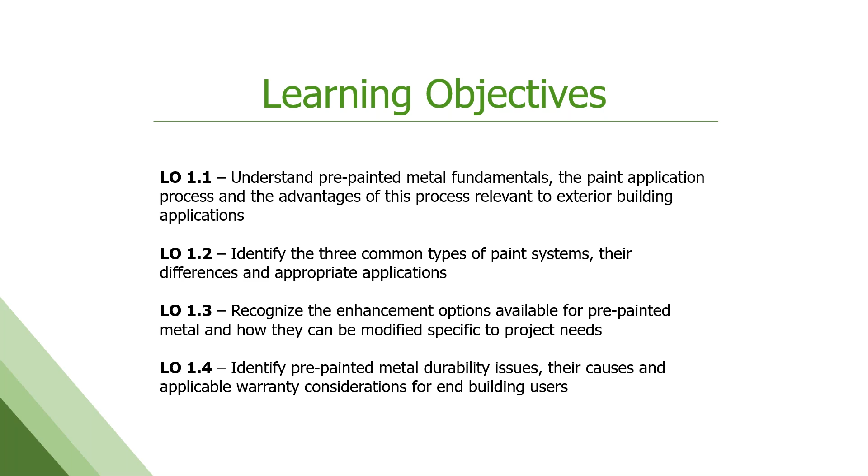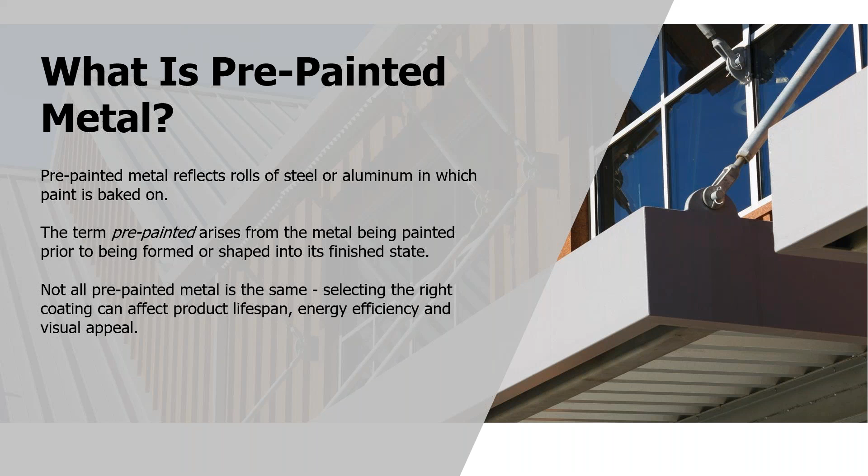So what is pre-painted metal? It's fairly self-explanatory. These are giant rolls of steel or aluminum which are painted in a factory environment, and the paint is cured onto a solid finish. I had for years used the analogy of giant rolls of toilet paper, which takes on a bit of a different connotation these days. But we're talking about 20, 30, 40,000 pound rolls of steel and aluminum, so not something that's easy to hoard. These giant rolls are painted first before they're formed into their final parts or pieces to go on the exterior of a building. But they're not all the same, and there are a lot of differences between them we're going to cover today.

Our first spotlight question that we'll answer in this next section is: how is paint applied to metal for the majority of building applications? It's rolled on for the most part, but not quite rolled on how you might be familiar with painting a room in your house. It's a little bit different process than that.

Here we have a diagram of a basic paint line, or coil coating line. We typically refer to it as coil coating in the industry. This is from the National Coil Coating Association, and there are also videos of this online if you want to check out an actual moving line. It's quite large, quite dynamic. It's a continuous process. The metal is cleaned first, then the paints are applied and baked on. This process typically runs anywhere from 100 to 700 feet per minute, so it's quite fast. The curing, the drying of the paint, usually only takes about 15 to 30 seconds, so very, very quick.

I like to compare this to the automotive world. Most people think of automotive paints and coatings as the end-all be-all of industrial coatings, and they're very good. There's a lot of crossover between automotive and coil coating as far as technique and chemistry. But a whole car these days takes about 30 minutes to 2 hours to finish, whereas we can paint enough coil through the coil coating process to build anywhere from 3 to 4, 5, 10 buildings in a matter of minutes. So it's a very different scale.

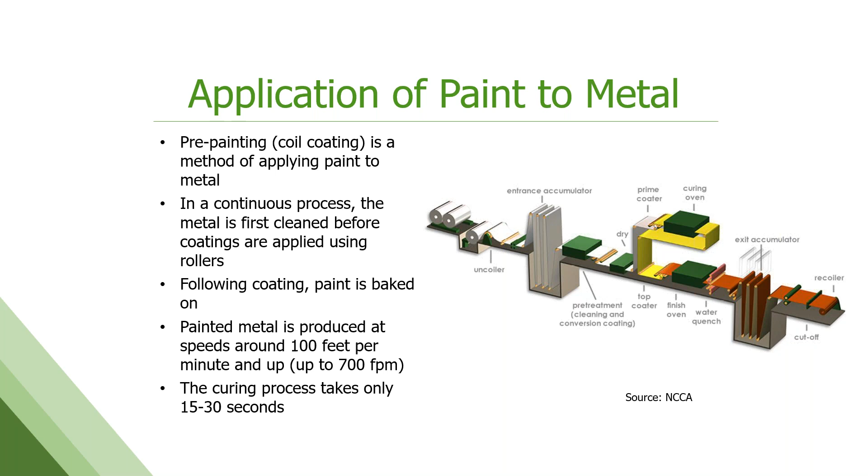Coil coating is the fastest and thinnest coating process in the industrial coatings world. This brings a lot of advantages to the table.

The substrate is cleaned and treated prior to the paint going on, and this all happens very quickly and in close succession to one another. So you get an incredibly great adhesion of the coating to the substrate. It's done in a very controlled manner, so we get great consistency from run to run, from batch to batch, from coil to coil.

It's a very efficient process as well. We're using very little paint. Typical paint system is about 1.4 mils thick. I'll do the math for you - that's 0.0014 inches. For comparison, paper is 2 to 3 times thicker than that. I'm going to layer a paint on that's thinner than paper.

By comparison, most other industrial coatings, including automotive, are 2 to 5 mils in thickness, so a substantial difference in the amount of paint. And because all of this is done before the fabrication of the final part, these coatings have to be hard, durable, but yet flexible as well. So there's a lot of chemistry and science that goes into the paint to make this happen.

The coil coating process, while we're using solvent-based paints, is a closed loop system. Our curing ovens capture and burn all the VOCs. We're not releasing anything into the environment, which is nice.

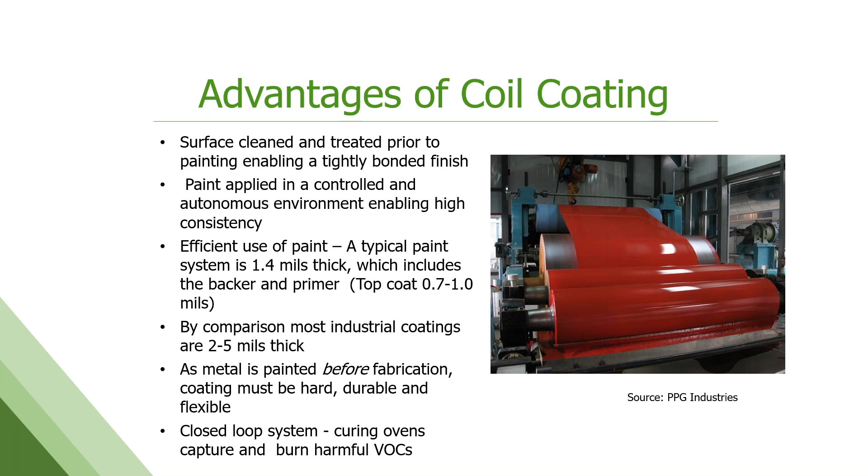However, there are a few limitations that come with this because of the scale of it. It's very, very rapid. Once you're set up and running, you need to paint a lot of material to make it cost effective and efficient, so we typically run large runs of the same color all at once. This is why most metal panel fabricators have a restricted or limited standard color palette, usually of 18 to 25 colors. Doesn't mean we can't do custom colors in smaller runs, but there are some cost and lead times that come with that. So that needs to be kept in mind.

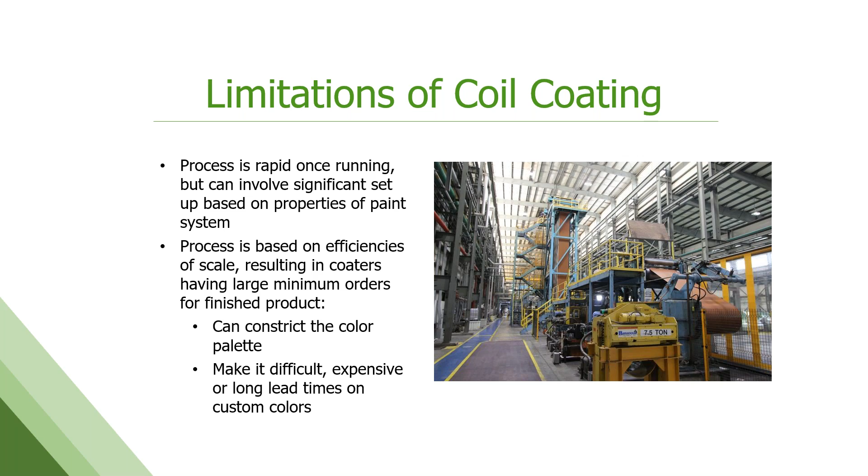The quality control through this process is quite rigorous. As you can imagine, these paints and substrates have to go through a lot of handling and forming after the fact. So the paint companies do a lot of rigorous quality control on the paints, and we do a lot of rigorous quality control on the finished product once the coil is painted. We've listed here some of the more critical ones.

The T-bend test, this is where we actually fold the metal back on itself very tightly, and we look to see if the substrate or the paint is cracking or opening. We do a reverse impact test where we drop a hard, sharp weight on the surface to make sure that the paint adheres and there's no cracking or delamination.

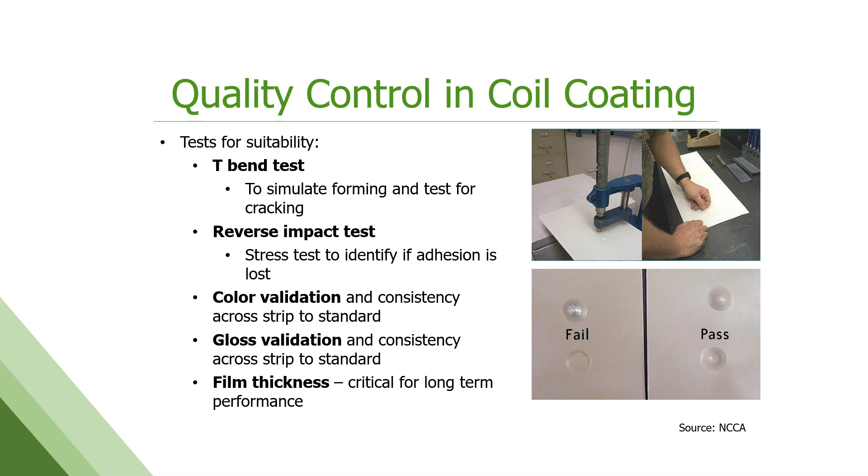We check color rigorously, which is very important, especially in the design world. That color needs to be consistent throughout the whole coil, needs to be consistent across the width of the strip, and color needs to be consistent from run to run and batch to batch. We check gloss, we check film thickness, which is very critical for not only appearance, but also the long-term performance and warranties involved, which we'll get into later in the presentation.

If you want to see any of those quality control tests done for real, I think there's videos on the Coil Coating Association website as well that you can check out, and you can see those tests actually being performed and what it takes.

So I want to talk a little bit now about the layers of a pre-painted metal panel, starting with the substrate itself, which, like I said, is usually a metallic coated steel or aluminum. Sometimes you see stainless and some other substrates, but it's usually steel or aluminum.

So working from the inside out, you have your base metal, let's say it's steel in this case, with a metallic coating, usually zinc or a zinc aluminum alloy, which we'll get into some specifics here in a few slides on that.

That provides corrosion resistance. After that, we have a pre-treatment that's applied, which helps with adhesion and again, corrosion protection long-term. After that, there's almost always a primer applied to both sides of the strip. Primer does a couple things. It helps provide bite and adhesion for the top coat that's going to go on.

It also adds another layer of corrosion protection. Then we have the top coat on the top side, which will be the color or pattern chosen for the installation. On the back side, we usually have what we call a backer or bottom side paint, which is there for protection and might also be seen depending on how the installation is done. So it needs to be visually pleasing as well. And then there are optional clear coats, which we'll talk about in a little more detail later on.

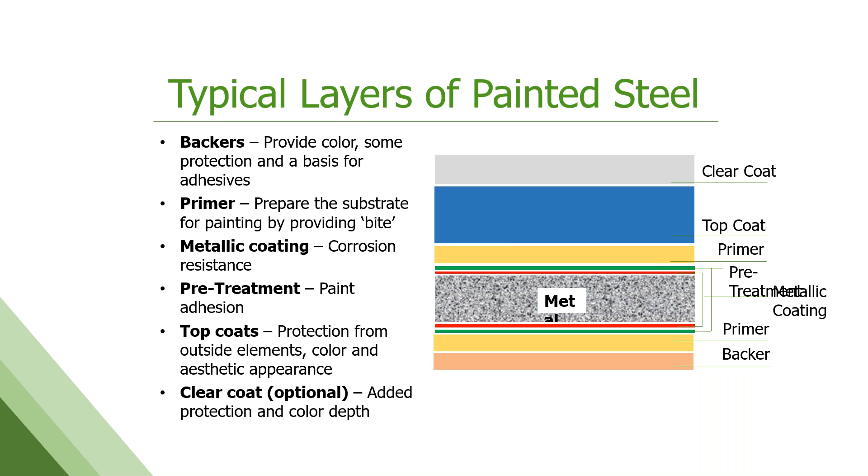So the metallic coating portion on the steel is really important. The two most common, of course, are hot dip galvanized and galvalume, or zinc aluminum. Hot dip galvanized is 100% zinc coating, been around a very, very long time. Most people are familiar with it. Galvalume or zinc aluminum are trade names for a 55% aluminum, 45% zinc combination, where the aluminum offers enhanced corrosion protection, and that 55% ratio is the optimum ratio to get superior performance out in the field. It's been around quite a long time now. We do see this product spec'd a lot in architectural specs for monumental type buildings and government jobs because of its superior performance over galvanized.

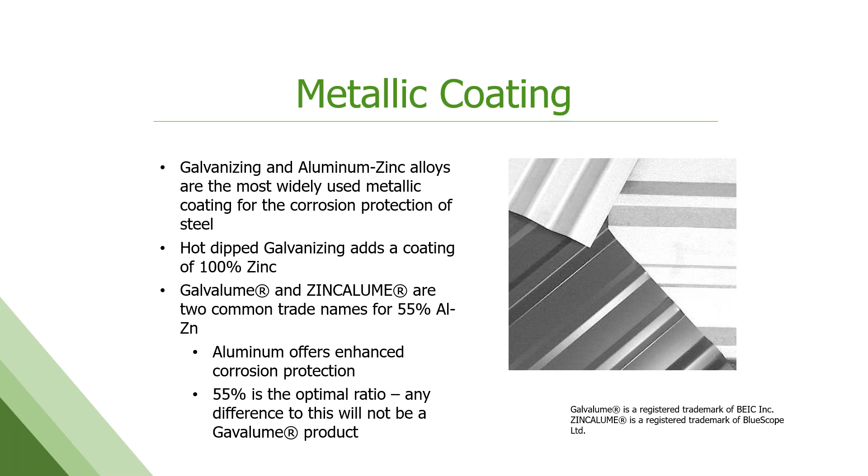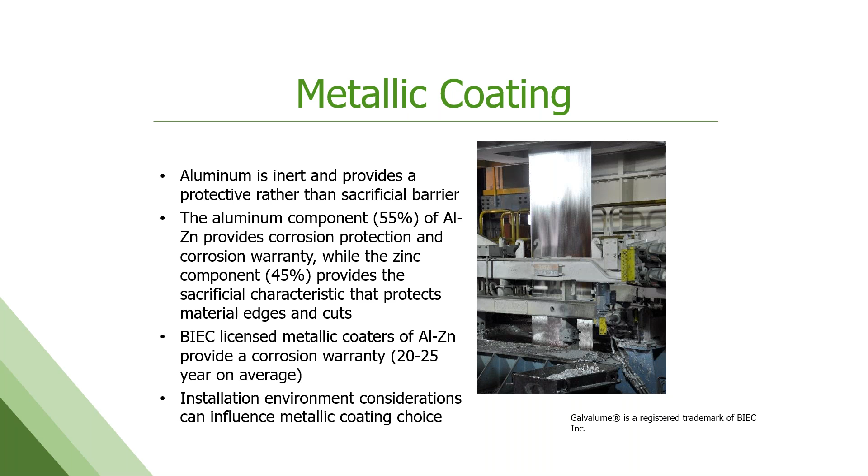The reason it's so good is that the aluminum portion is inert, so it provides a protective barrier rather than just sacrificial, which is what the zinc does. Most of these types of substrates come with some sort of corrosion warranty. If they're licensed - you do have to be licensed to make this product - BIEC is the license holder and manager of that product. Most of the corrosion warranties out there are 20 to 25 years on average, which is not something you're going to get on just straight galvanized steel substrate.

So then we move on to the paint portion - the fun part, really, the part we see, the part that's designed around. What is paint? I think most of us know what paint is, right? It's a liquid designed for application to a surface in a thin film that cures to a solid film. It does two primary things at the end of the day: it protects the surface of whatever it's on, and it creates the desired aesthetic. And as we just reviewed, the methods for application can be quite varied: brushing, dipping, spraying, vacuum coating, and rolling. Large scale rolling is what we're talking about here today.

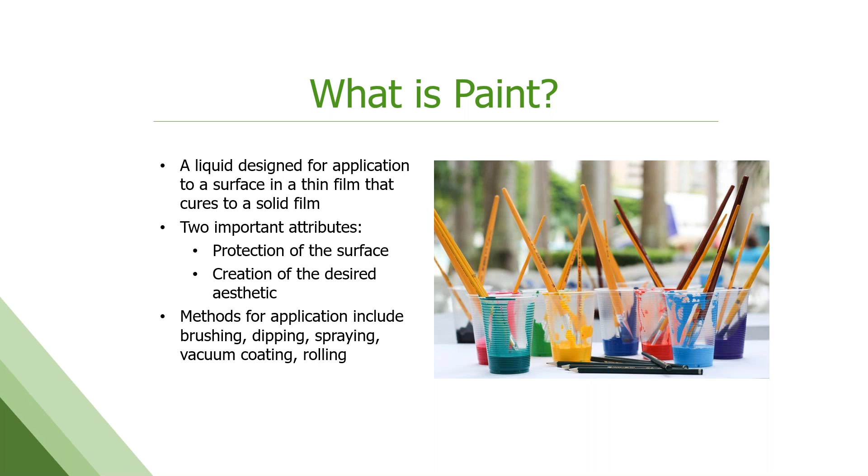There's a lot of components to paint, and this is where we're going to talk a little bit about chemistry. I'm not going to make you do any chemistry, I promise, today - no math either. So the primary components of these paint systems are broken down into four: resins or polymers, that's the binder of the paint and determines most of the physical and chemical properties of the paint system; and pigments, which obviously is the color and look of the paint.

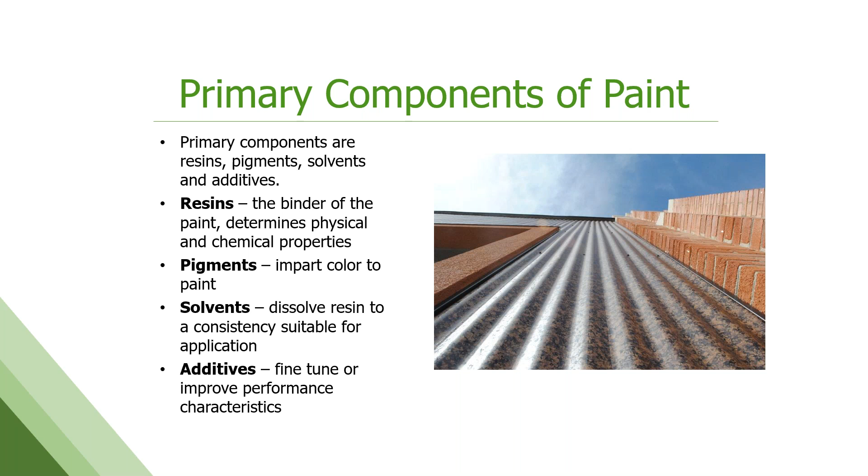Solvents - we've got to make it liquid so we can apply it. In our industry, they are petro-type solvents, hydrocarbon type solvents. We don't use waterborne systems very often; that's pretty rare. And then there are additives that are used to fine-tune the coating, either for performance enhancements or particular end uses.

Here's a summary of what each of these bring to the table. The resin, again, really is the backbone of the paint system. It's going to provide the durability, hardness, flexibility, adhesion, gloss, corrosion resistance, chemical resistance, and long-term performance out in the elements. The pigments, while mostly aesthetic - color and hiding - also provide corrosion resistance, film strength, water resistance, and, not listed here, UV performance, so that we don't want them to fade.

And again, the solvents are really for the application side - all those solvents are gone in the finished product, they're not left, but they allow us as the applicator to be able to pump it. They come in 50-gallon drums. We've got to be able to pump it, get it into the coater head, have good flow, easy cleanup, and be able to control film, those sorts of things.

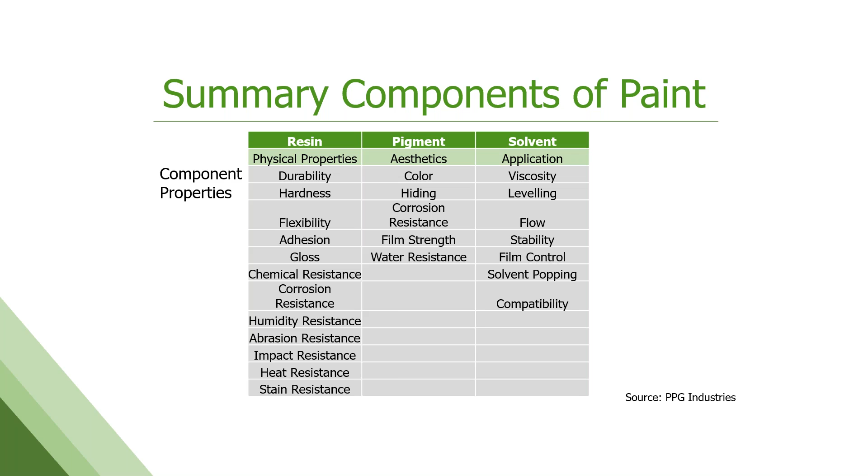So if you look at how these components make up the composition, this is a typical average weight percentage. The resin is a lot of it, along with the solvents in the liquid form, which are gone by the end. Then the pigments - your pigment to resin or polymer binder ratio is typically pretty equal, so there's a lot of pigments in these systems. And then the additives are very small.

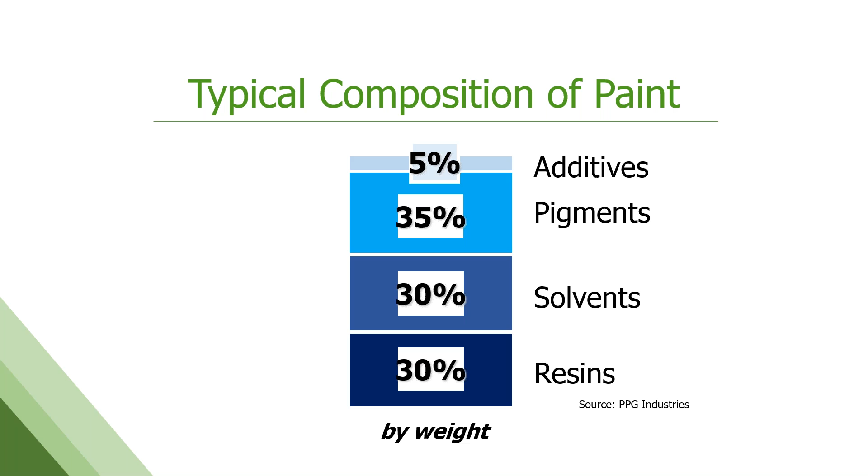So how do you pick the right paint? There's a lot that goes into this. You need the right balance for the end use. On one edge, we've got very soft, flexible coatings, which might be good for particular end uses, but they might not have great impact resistance and may scratch easier. On the other extreme, you have very hard, brittle coatings, which may have better performance in some aspects, but you might not be able to bend it into a panel. So we're always trying to find a happy medium when formulating paint for pre-painted metal.

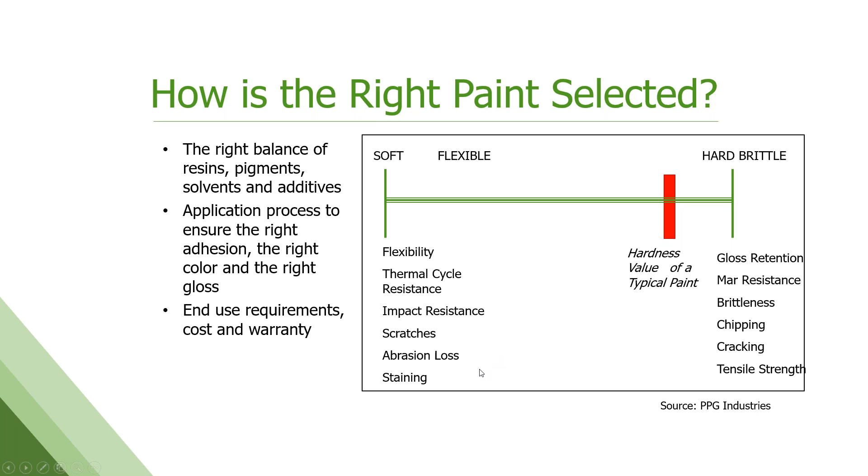So then if we get into pigments and color, pigments are insoluble solid particles. We have to grind them really finely to disperse them within the resin to get good stability and good consistent color. There are two different kinds of pigments we use in this industry, primarily inorganic and organic.

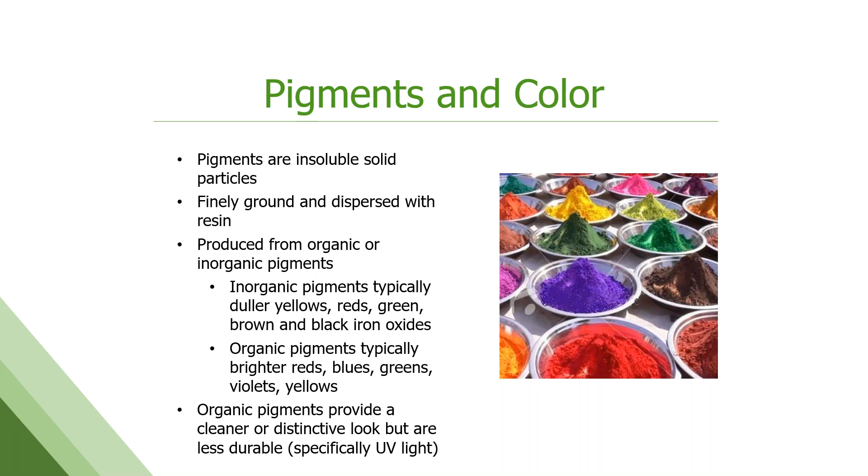The science of color is very important in our world as well. Color is the eye's perception in the visible wavelengths. We can do this numerically and with computers, represented as an LAB number. L is dark, A is the red-green scale, and B is the blue-yellow scale. Most of our painted products are assessed by a computer for color, but also with a visual eye at the end of the process, and very tightly controlled—controlled at a level the human eye cannot perceive, but the computers can.

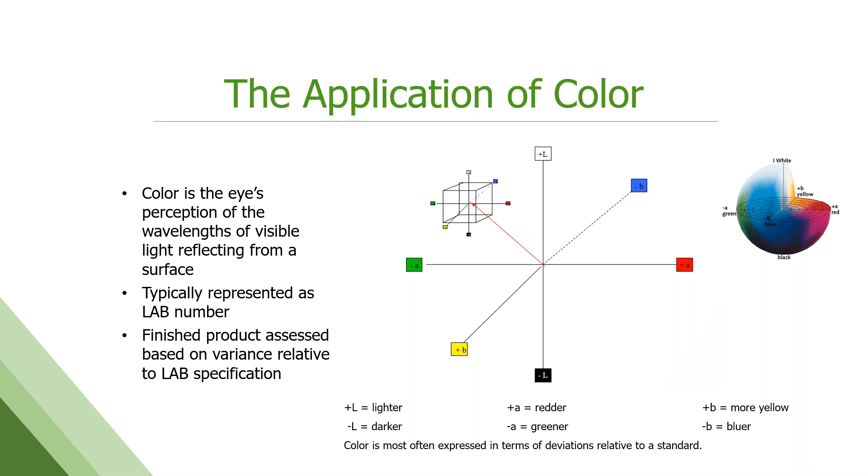So I don't know if we want to stop here real quick for some questions.

Hi, Michelle. We've got a couple of questions here. Jack is asking about when you're putting all those layers on during the run, are the layers applied in the same run, I think he means. Yeah, excellent question. I should have made that more clear.

Thank you. So most paint lines can do two layers of paint in what we call one pass. We do primer, bake it through the oven, it goes to the finish coater, gets its finish coat, goes through the ovens, gets baked, and it's done. If we need more coats than that, we would put the coil back through the line and add additional paint. But typically you can do two layers, top and bottom, in one go.

Great, thank you. The second question is from Philip. You may be addressing this later in a later section, but he's asking about the weathering ability of bonderized finish on panels.

I'm not going to get into bonderized specifically in this presentation. I can tell you that bonderized was developed many years ago, specifically to help combat acid rain issues in the northeastern United States—that's where it originated. So it's a pre-treatment under the paint. It does have some enhanced corrosion performance, especially in acidic environments, although as a country we've done a very good job of reducing acid rain, so it's not as much of an issue as it used to be. But no, that's not specifically going to be in this presentation.

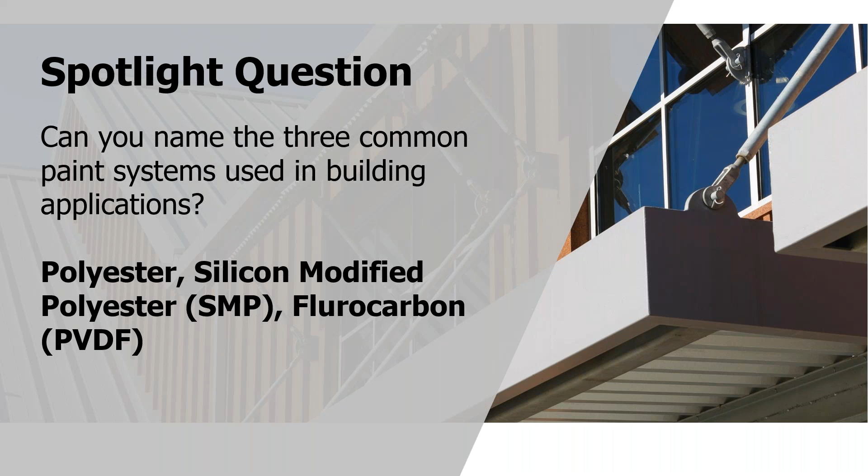Okay, thanks. So the next section here is going to be the common paint systems and their differences and attributes. Can you name the three common paint systems used in building applications? Well, you're going to be able to here shortly. So the three we deal with the most are what we call polyesters, silicone modified polyesters or SMPs, and fluorocarbons or PVDFs.

Unfortunately, we as an industry have decided that fluorocarbons need about 8 different other names just to add confusion to the mix. Polyesters are almost always called polyesters. Silicone modified polyesters are almost always referred to as SMPs. However, fluorocarbons go by a whole range of names, and I've listed some of the most common ones here. PVDF, polyvinylidene fluoride - that's the hardest chemistry we're going to have today, FYI.

That is also known as Kynar 500 or Hylar 5000, and that Kynar and Hylar name are probably what you would see most often in architectural specs and Corps of Engineers specs. They are registered trademarks - you have to be licensed to use that resin or polymer chemistry, and there's some very tight guidelines around its use that have to be followed as well.

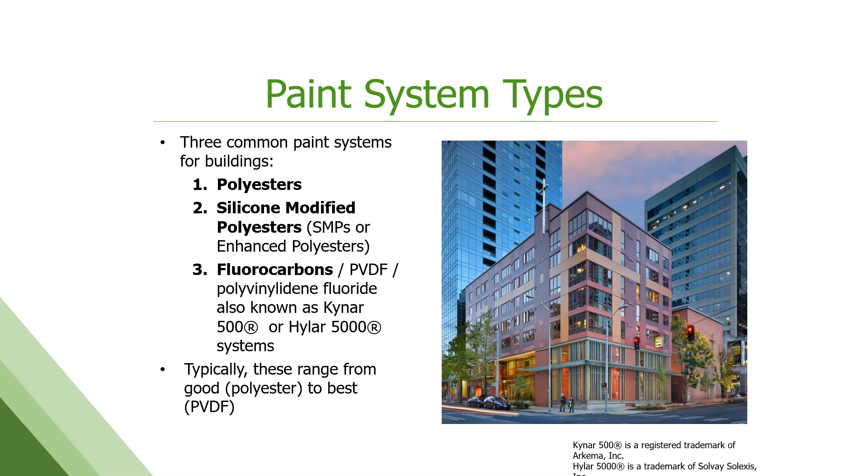These are listed from good to best, but we're going to see that there's a lot of range, especially within the polyesters and what they can do.

Polyesters have the widest range of formulation and can be used in the widest range of applications, everything from interior non-exposed components to exterior components. They're very cost effective. They can have great flexibility and hardness. They come in a wide range of colors and gloss options. Very, very versatile. We typically see it for exterior use in gutters and downspouts, rainwater goods, agriculture and light commercial, and appliance wrappers.

But again, I always like to point out the flexibility of polyesters with this example. So think about polyester paint that's on this lovely little outbuilding that we have here versus the polyester clothing you might wear - same base chemistry at the end of the day, but two very different outcomes in how it's formulated and made. So polyesters run the gamut.

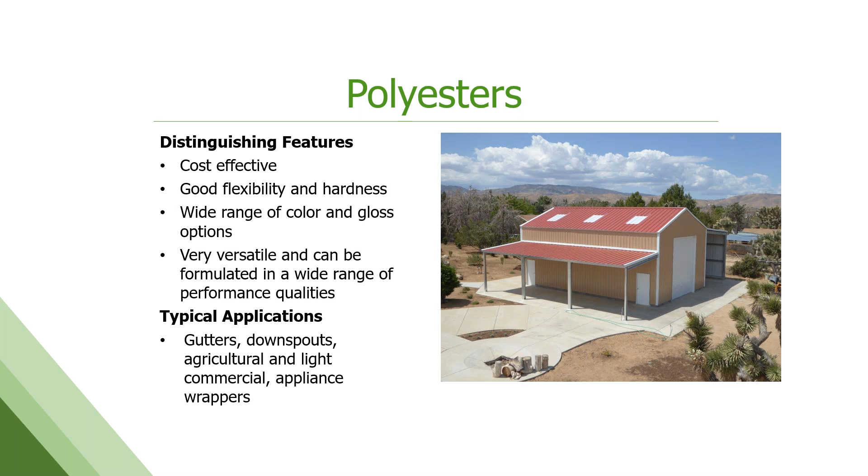Silicone modified polyesters are just what they sound like. These are polyesters that have had a silicone modifier added to their backbone that gives them improved weatherability and durability out in the field, improved resistance to chalk and fade.

Still available in a wide range of colors. A little bit better cost point than the PVDFs, which are the high end, but maybe a little bit more expensive than polyesters. We see SMPs used a lot in light commercial and residential. They're a really good product for those end uses.

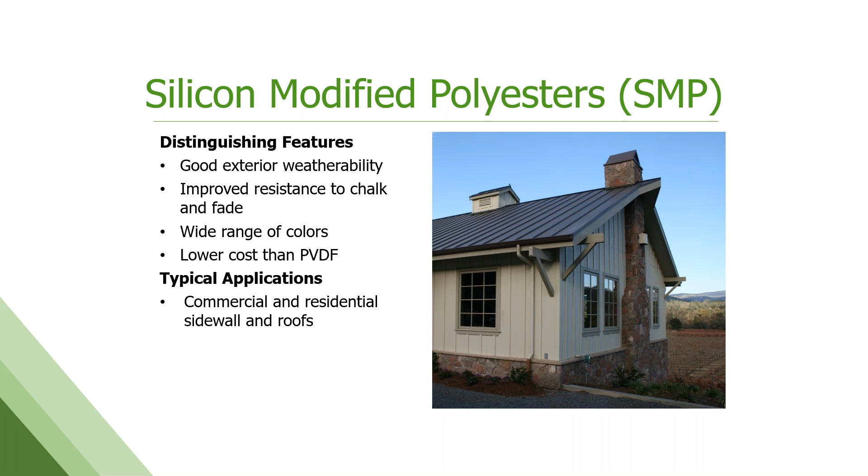The fluorocarbons now, this is the Cadillac. This is the end all be all. It has been for a long time in this industry. They go by several names, but they have superior and exceptional chalk and fade resistance. They hold up well in aggressive environments, whether that be industrial or marine, great chemical resistance. They have excellent formability. And we see these again on high-end architectural projects, monumental type buildings, and anywhere it's specified, and where you need good weatherability.

They really are great products. I like to point out, to put it in some context, PVDF is one atom removed from Teflon. So this is the closest cousin to Teflon that there is. And most people can wrap their head around Teflon and how durable that product is. So this is a very close cousin.

We don't work with Teflon directly because the heat required to make Teflon into a manageable form isn't really feasible, and it's very hard to get it into a liquid state like we need for the application process. So this is sort of the next best thing.

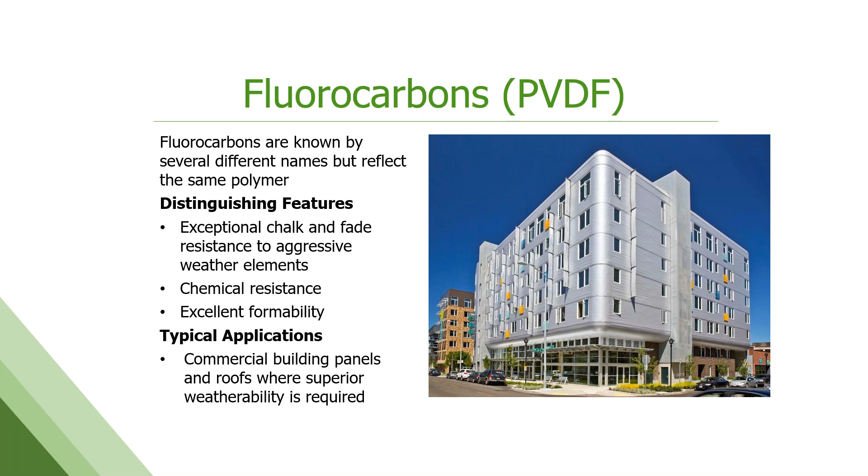So the polyesters can be good to better, they're cost effective. Warranties on them range from none to moderate, like 20, 25 years. Their durability is limited to good, very versatile, wide range of colors. They do meet the AAMA 2603 621 specs.

SMPs step up - you get a moderate price point. Warranties on SMPs can be quite good; we're seeing anything from 25 to 40 years now in the industry. Durability is medium to high, and that's sort of dependent on the pigmentation that's used, not necessarily the resin itself. Wide range of applications, and again, meets AAMA 2604 better and 621.

And then the PVDFs or the Kynar, really the best overall paint system, but a high price point, but very long warranties - we're seeing warranties 30 to 50 years in some cases now, which boggles my mind a little bit. The best durability you're going to get out of the paint systems. Again, high-end architectural, commercial, high-profile projects primarily. Excellent chalk and fade resistance and chemical resistance. And it is spec to AAMA 2605 and 621.

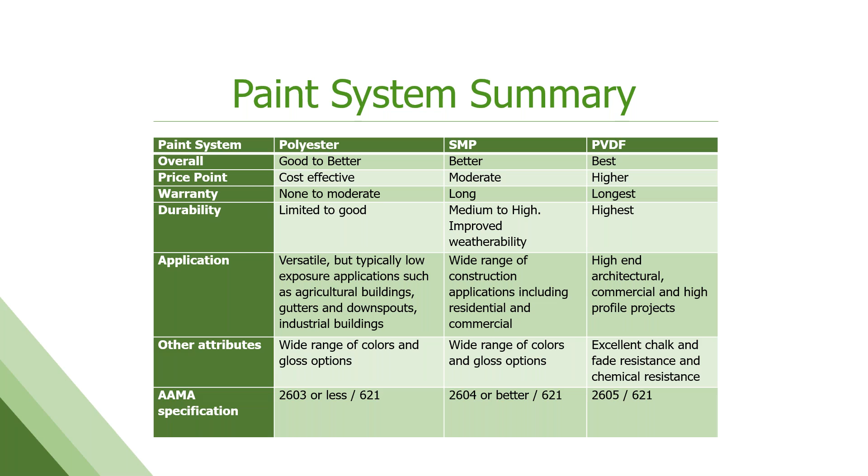So what are the considerations? You know, all these paint systems are out there. It's a bit overwhelming. How do you just sort of decide what you want to do?

So these are the things to keep in mind. First of all, because of the wide range of polyesters, they're not all the same. If someone says a polyester will be fine, you probably need to ask a lot of questions, find out what the warranty really is, and is it a polyester that's really designed for exterior application. These days, the differential between high-end polyesters and the SMPs can be marginal. The very high-end polyesters have gotten very, very good in the last 10 years and do have very good performance, so they've closed that gap considerably.

However, the PVDF is still going to be the best UV resistance for optimal exterior durability. Again, the Kynar and Hylar name is a trade name, and you have to be licensed. If a paint supplier does not have a license to use that product, they cannot use those names. That's more of a concern with product coming in out of Asia, which is typically not licensed. All the big US manufacturers are licensed and good to go. You've got to use at least 70% of that PVDF Kynar resin in the overall resin composition to get good performance. Anything less than that's really not going to perform very well.

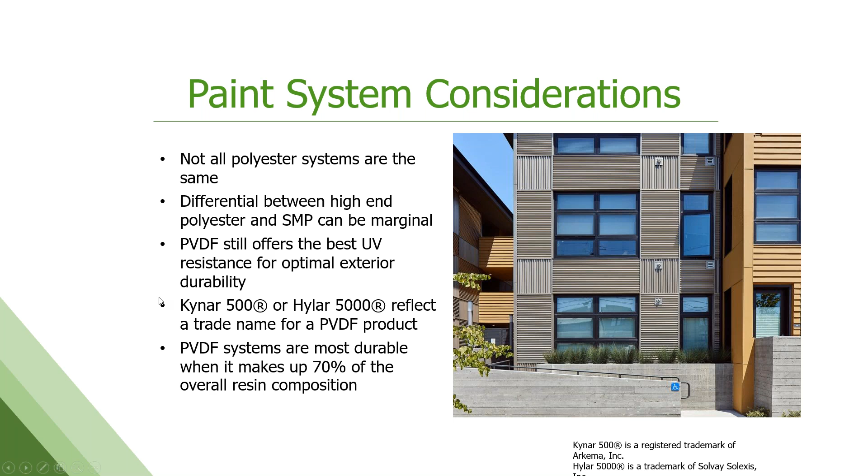Tyler's asking about cold weather performance of paints in Alaska. Are there some paints that perform better? Do all paints perform the same? We've not seen, once installation is done, much difference in performance versus warmer weather. The one thing we do run into in cold weather is the actual forming of the metal. When a fabricator has got coil and they're forming panels, if it's done in cold weather, there can be issues. The paint might crack or undergo a phenomenon we call hazing, where you get a blushing effect on the paint until it warms up again. So not too many issues once installed in cold climates, but anyone forming or roll forming products in a cold climate needs to use some caution. A lot of those guys actually use infrared lights and heaters on their equipment to warm the steel and the paint up a little bit before they form it to avoid those problems.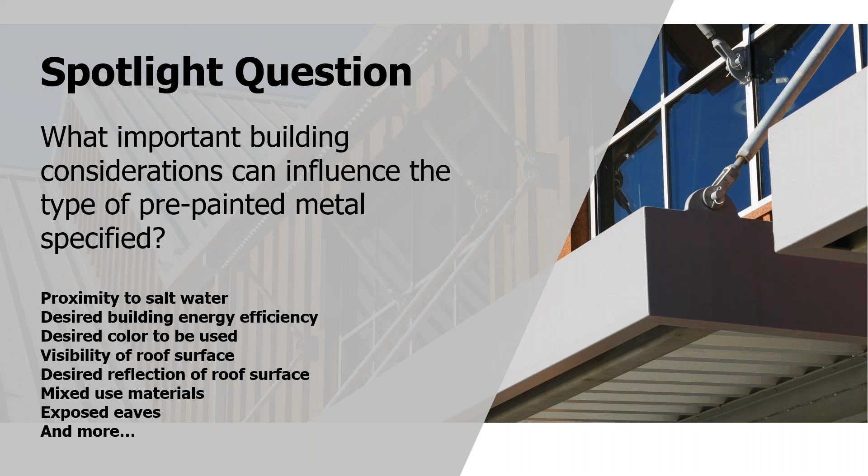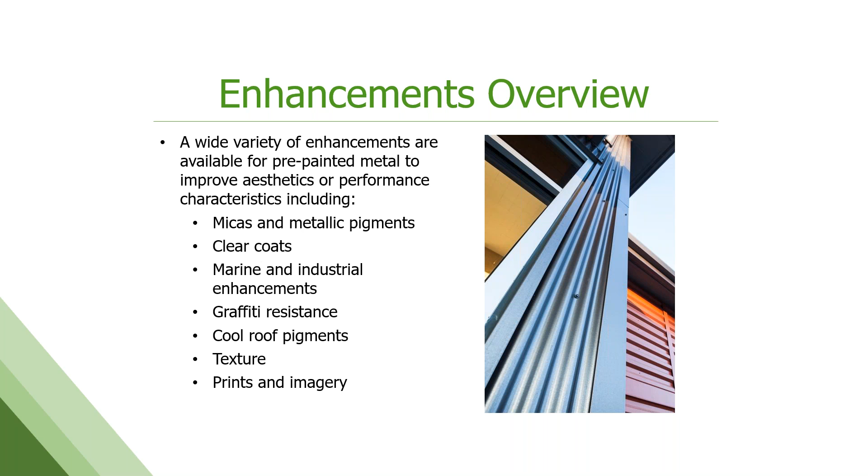So we've broken this down. This is not all of them, just the more common ones we run into on a regular basis for enhancements: micas and metallic pigments, clear coats and what they can and can't do, marine and industrial enhancements, graffiti resistance, cool roof pigments, energy efficiency, textures, and prints and imagery that can be done.

Micas and metallics are actually fairly common these days. Most panel manufacturers have a few metallic colors on their standard palette. Historically you used real metal flakes to achieve the sparkly, shiny look, but that has progressed to mica pigments. We still use the term metallic in the industry, but the majority are actually mica pigments, giving a sparkling or light-catching effect.

There's also pearlescent or color-shifting pigments available. Some of you may have seen that used on cars more than buildings, but they are out there. One project I can think of, for anyone on the West Coast—you can Google pictures of it—the cruise ship terminal in San Diego is a color-changing effect installation, and as you move around the building the color changes from an aqua blue to a dark blue. It's quite impressive and very pretty. So those are out there and available.

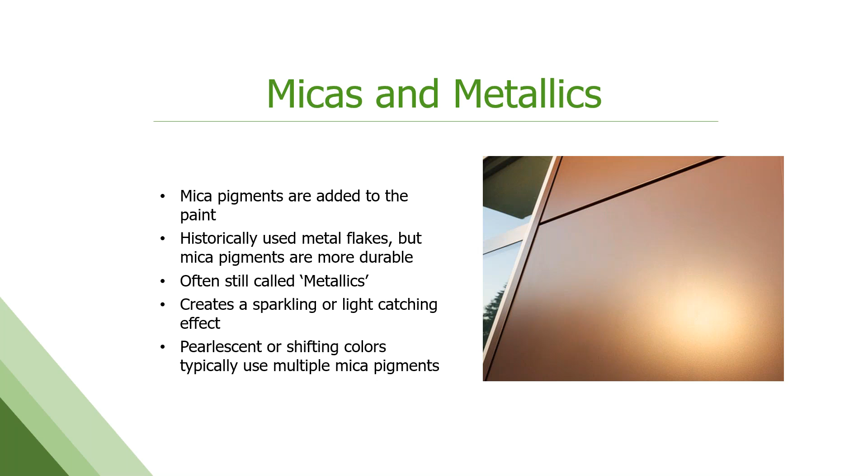However, this is the do-not-do part when it comes to micas. The mica pigments' orientation—how they lay out in the paint—is very important, and they're directional. When you look at it from one direction it looks one way; you shift to another viewing angle and the color visually shifts a little bit. So you've got to be really careful when you install these.

Both of these examples are silvers run out of one batch, one coil, all at the same time. But during installation, the installers flipped a panel 180 degrees relative to its adjacent panels, and you can see the visual difference. One way we combat this is to put directional arrows on the back side, so they all get installed going the same direction.

But they are batch sensitive too. So if you're going to do a project with one of these micas or metallic paints, you really want to run all the material at one time out of the same batch of paint, at the same time on the coil coating line.

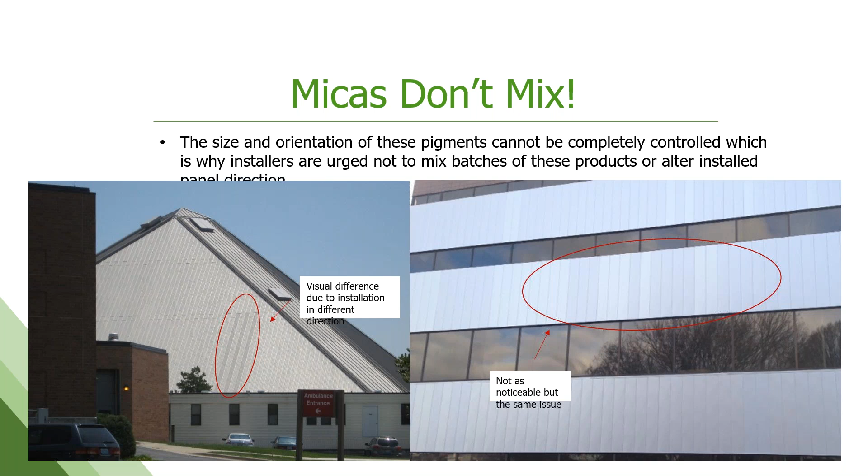Extreme environments—this is something we deal with a lot, especially at Steelscape, a company I work for, being primarily a West Coast company. We do a lot of work near the ocean in proximity to salt water, and we have ways to combat that. There are paint systems modified and enhanced to deal with the extra corrosion potential. There are coastal and marine paint systems available that can still come with a warranty—probably not as long as a regular paint system, but it is still warrantable.

These typically include high-build primers and/or the addition of clear coats to give extra protection, and these will be 3 to 4 layers. Someone asked earlier about how many layers of paint you can do at one time—for these marine and/or industrial environments, like chemical processing plants or mining operations, we typically have to put that coil of metal back through the line at least twice to get enough paint on it to perform in these environments.

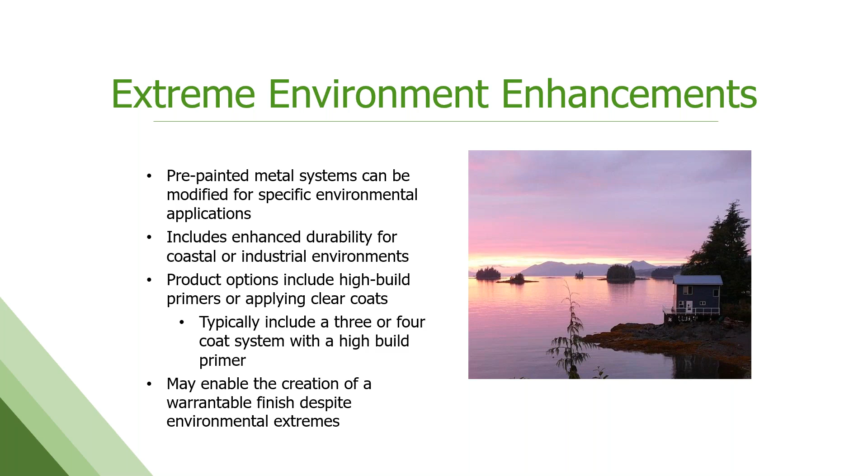The other thing clear coats can do for us is provide extra UV fade resistance, especially over organically pigmented colors. We talked about organic pigments earlier—those bright exotic primary colors don't hold up well, but you can put a clear coat over them with transparent sun blocker, UV blocking technology built in, to help protect them long term.

Clear coats can also be added to get higher gloss and add a sort of depth to the final product. They can also increase hardness and mar resistance, and antimicrobial properties—we do have antimicrobial clears. Don't see those used in exterior applications too much, but they're used a lot for walk-in coolers and food storage situations.

Graffiti resistance is a big deal too. There are clear coats out there that it's very hard to get anything else to stick to—paints, inks, or pens just can't adhere. And if it does stick, they're formulated to be very easily cleaned off without leaving any shadows or trace of the graffiti on the surface.

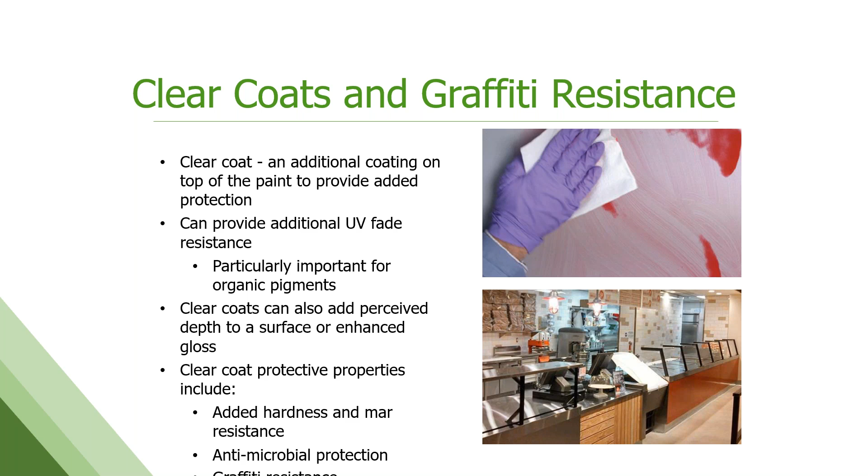But yet another cautionary tale—this one's not so bad. If you're going to use a clear coat, or if a clear coat is needed for some reason, you need to understand that clear, while we call it clear, does slightly alter the base color visually a little bit. These clear coats actually have a very slight yellow tint to them, which is from the UV blockers used in them. So on lighter colors, an example here, you can see from left to right: no clear coat, then with a high build primer, which can also affect color, and then with a high build primer and a clear coat. You can see that lighter color shifts yellow a little bit visually, but the medium and darker colors, you can't really perceive it.

So just a caution: if you're going to do a job that needs a clear coat, understand that it might shift the color a little bit, and that can be overcome with a reformulation of the color coat underneath in a lot of cases.

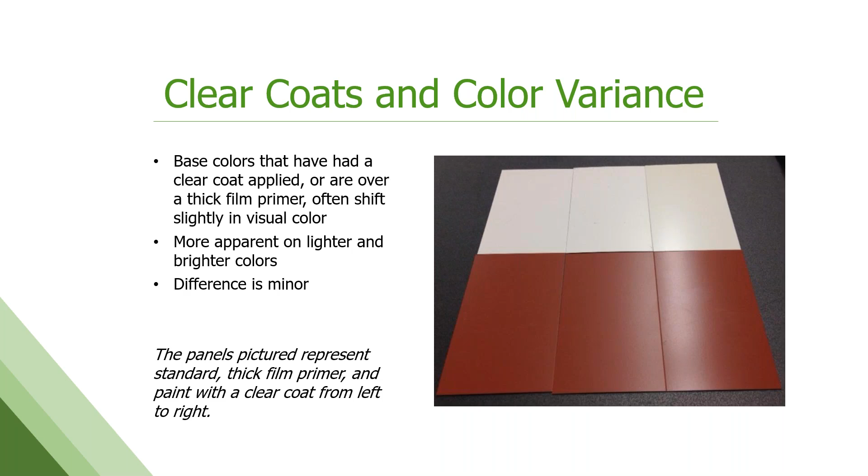Backers, or bottom side paint—this is the back side of the coil or the strip. It's often sort of taken for granted and overlooked because they're usually not seen, but we still apply them. It helps with transit abrasion, corrosion, and formability to have paint on that back side. It's typically an off-white or a light gray, some kind of neutral color. However, on eaves or overhangs, it might be exposed, so people are going to see it, and it does need to have some color consistency and control to it. That said, most paint coaters, coating operations, can do double-sided paint. So if you wanted red on both sides, that's doable. If that backside is going to be exposed and you want it to be an actual color, that can happen.

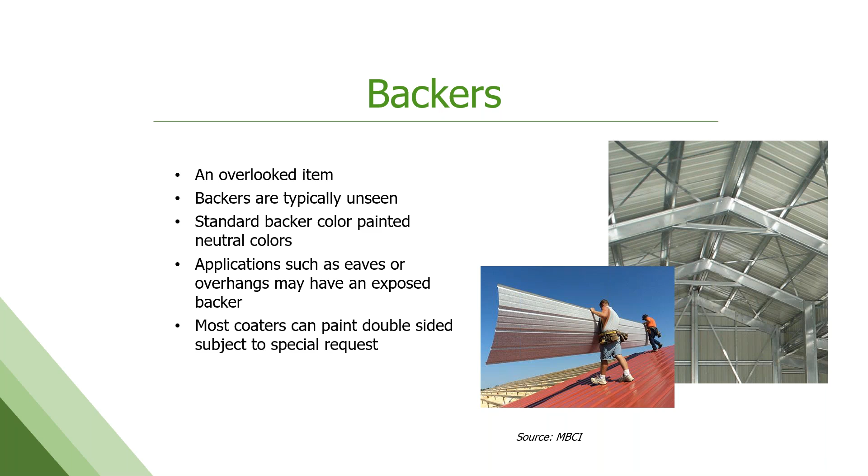Now we'll move into the cool colors, which, as Paul said early on, I was very involved in the development of and launch into the market. Probably the biggest advancement and change in the coil coating world in the last 20 years, which has been fantastic. What happened is that one of the pigment companies was able to come up with pigments that reflect infrared heat without changing their visual color appearance. The infrared wavelength is where heat generation occurs on surfaces, so that's important. This allowed us to develop dark colors—visually dark colors—that stay cooler than their non-cool counterparts.

Any paint system can be modified to be cool. It's all about the pigmentation, it doesn't have anything to do with the resin or the polymer. It does truly minimize heat buildup and reduces cooling cost in warmer climates. Actually, this has really become standard. Most paint companies, especially in the PVDF or Kynar paint lines, are formulated with these cool pigments as a standard. You don't have to request it anymore—it's become the norm.

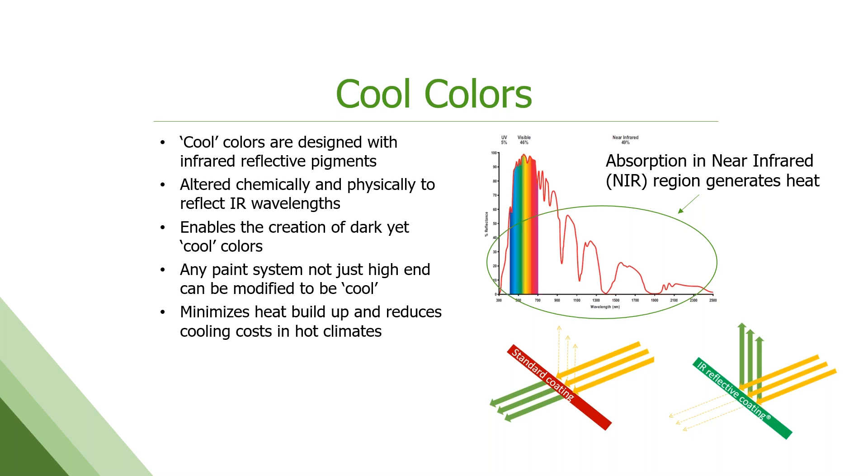There are quite a few terms out there that can be a bit confusing around cool pigments and cool paints, so we'll go over a few of those here. Solar reflectance is a big one—this is the amount of solar radiation reflected off a surface, measured as a percent. Emissivity is how well a surface dissipates heat from itself once it's gotten hot. That's important, because we know things are going to get hot in sunlight, but we want them to be able to cool or shed that heat well.

Those two values are then plugged into a very long, nasty calculation that gives you the solar reflectance index value, or SRI. This SRI value is what we see now in most of the codes. Both LEED, obviously, you guys are probably familiar with that, references SRI values. A lot of state and local building codes, especially in California, use SRI requirements now as well. The Cool Roof Rating Council is the primary third party that validates and measures this for manufacturers.

One interesting thing about pre-painted metal that's a huge advantage is that its SRI value does not deteriorate over time like other roofing substrates do. Typically it's an initial rating and a 3-year aged rating, and you will see if you go online to Cool Roof Rating Council that pre-painted metal 3 years out from its initial has the exact same SRI value it did initially. You can go 10, 20 years out and that SRI value does not deteriorate on pre-painted metal. It's because these coatings have such great durability—they're not degrading, they're not fading, they're not changing over time, which we think is a huge advantage for this product.

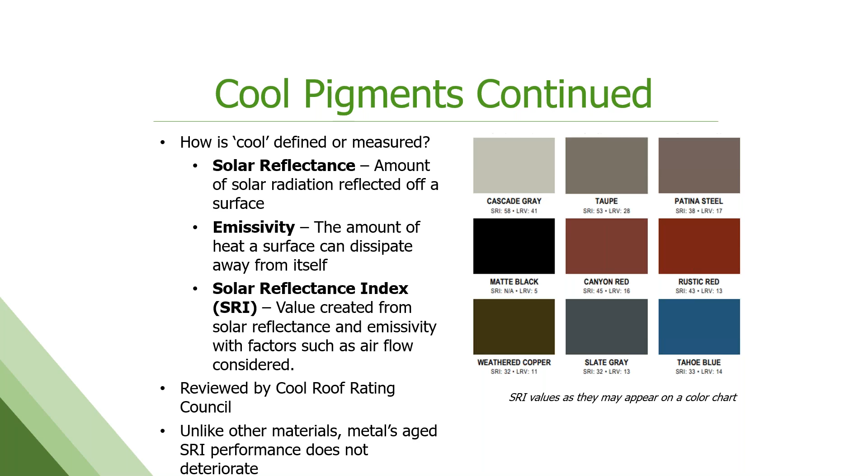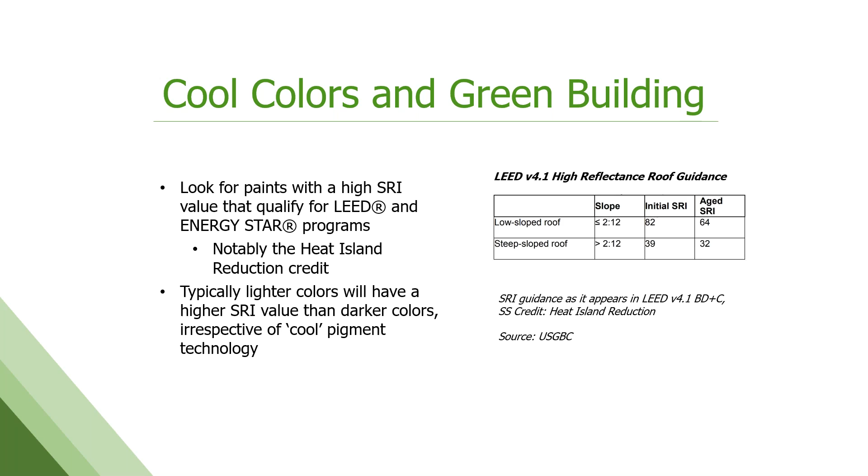Here's some of the LEED 4.1 specifications for SRI. Low slope moved up to 82 — I think it used to be 78 or 79 way back when. Steep slope is now an initial SRI value of 39. For low slope roofs, to get an SRI of 82, you're talking about whites and light colors only. For steep sloped roofs, you can get down into your medium colors and still reach that value.

The other item that has come up more and more in recent years is light reflectance or glare off of metal roofs. This can be perceived as a deterrent to using metal — the glare, the shininess of it. This reflectance value sometimes gets confused with the solar reflectance value we just talked about, but they are two very different and independent values.

Light reflectance is expressed as a percentage, and it's measuring the amount of visible or usable light that gets reflected off of a surface. Typically, lighter colors will have a higher value than dark colors, but not always. Texture can impact this — if you add some texture to the coating, it breaks up that glare or shine quite well, which is a plus in a lot of applications.

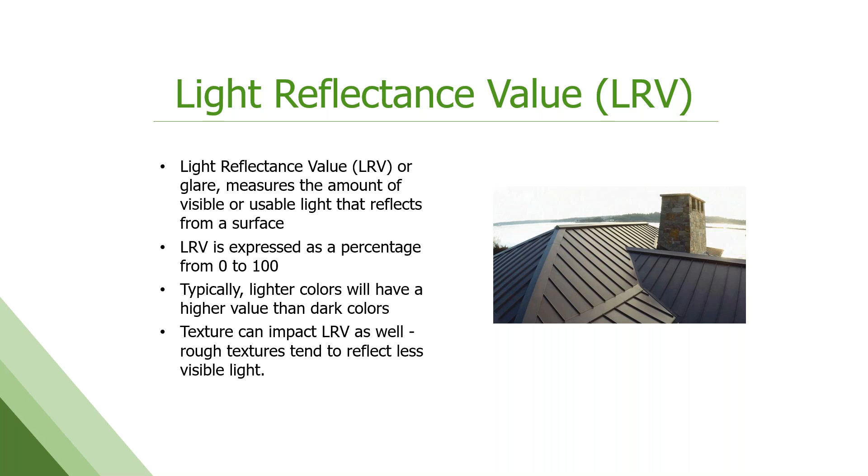We use a couple different terms around light reflectance: gloss and sheen. Gloss is the measurement of visible light at a 60-degree viewing angle. Sheen is measured at an 85-degree viewing angle. High gloss, high sheen on a paint system is going to result in a lot of glare, while low gloss, low sheen is going to have a very flat or matte appearance.

We have some examples over there of how those values end up affecting the LRV at the end of the day. Low gloss, low sheen is typically defined in our industry as being less than 8. Most standard paints these days in the Kynar paint system are in the 10 to 20 range, which is pretty common — so it's not high, but it's not super low either.

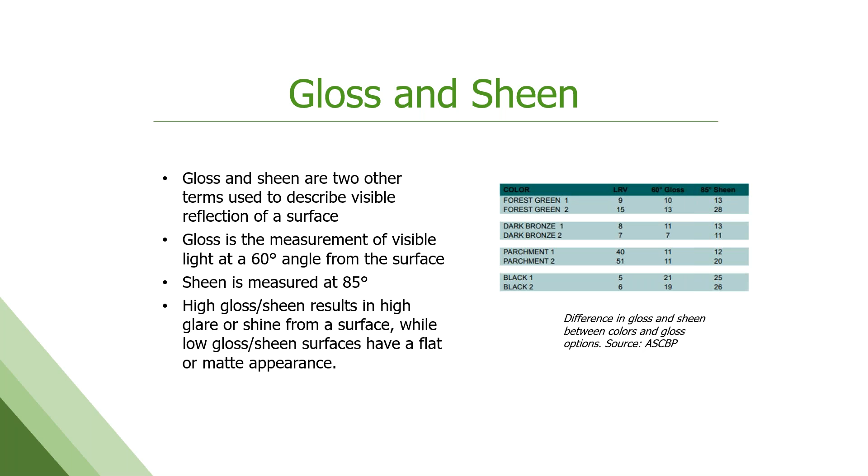But we're seeing that there's still a need for very high gloss applications for accents and signage. In the residential world, people are wanting to move to a more matte, less shiny finish. It's also an issue around airports and military installations, which have some pretty strict requirements about glare. Obviously, you don't want a pilot blinded by the shine off of a metal roof that impairs his ability to fly his aircraft. So we run into that.

Mentioned textures — textures are a great look, and we're seeing more and more of these. They not only help with glare and shine, but they give a really interesting depth, feel, and look to a finished product. This is done a couple ways: the paint chemistry can be altered to cause the paint system to wrinkle up as it cures, or you can actually add particulates and texturizing agents to the paint to get this rough finish.

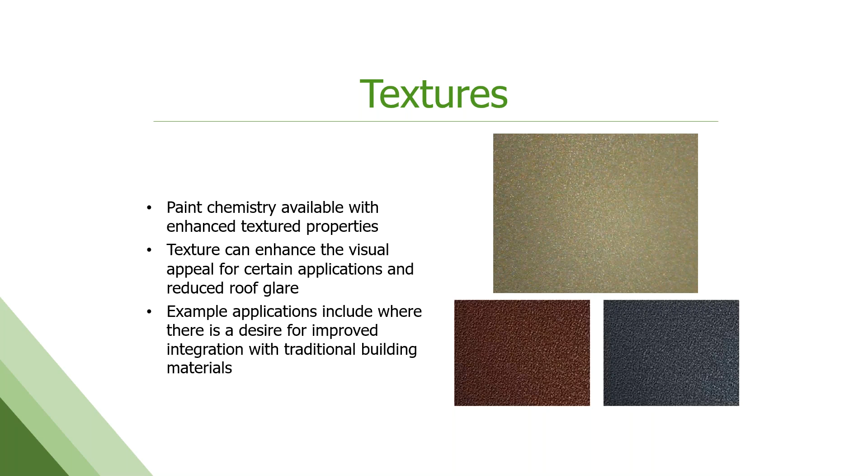The other very common enhancement we see, and has been around for a long time, is patterns — not just a solid color, since solid colors can become a little boring. Rolling, print rolling, decorative type patterns can be applied to the strip, using the same paint systems we've talked about. Development timeline to create the patterns can be pretty short. However, you do have to deal with repeat — our applicator rolls are a certain diameter and it's going to repeat, so you have to be careful that it's not an obvious repeating pattern on the finished product.

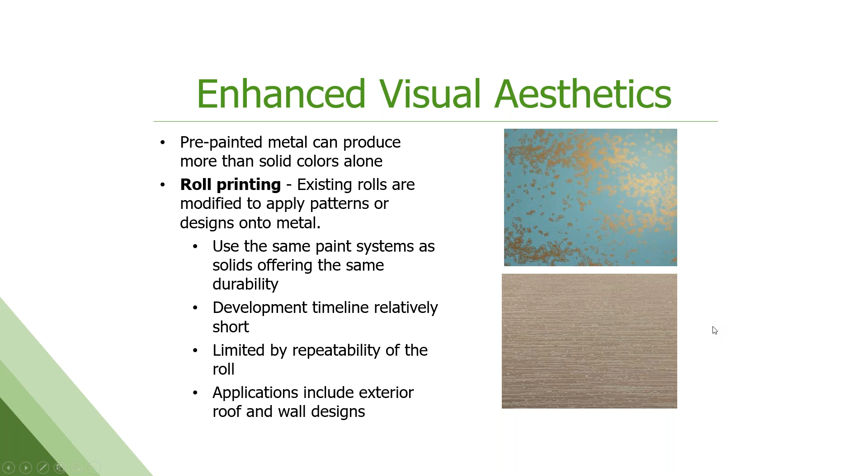Here's some examples of a faux patina, copper patina pattern, and a brushed look at the bottom. You can do these with a solid base coat and one pattern coat, or you can do multiple pattern coats in different colors. Wood grain is something we're seeing more of as well — we can do wood grain patterns.

The other less common, but they're out there, ways to get a pattern or an image is the use of laminates. These are printed films that are then bonded to the metal surface, and we see these a lot for garage doors and interior applications. They don't have quite the same long-term durability as regular painted product, but the wood finish is really quite popular with this technique.

The other new technology that's fairly new and has emerged in the last couple of years is digital printing. These are basically giant inkjet printers that go on a paint line, and you can print pictures, any kind of image you want, in multiple colors. So it's large scale printing, and we're all a bit excited to see how this goes. The first lines utilizing this have just come on board in the last 12 to 18 months, so still in its developmental phase, but could be very interesting moving forward with its capability.

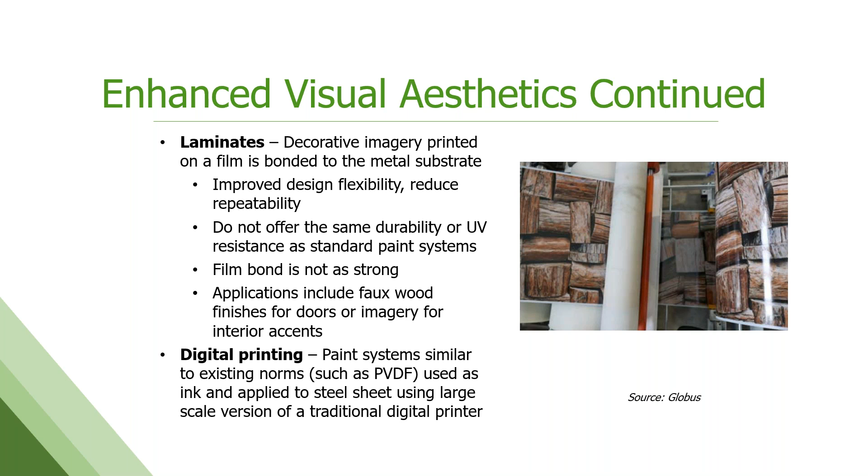Ron is asking, how do you spec the backer coats? Is there something specific you need to do to spec those? Yeah, it depends. If you don't have a discussion about the backer coat, it's going to be whatever the panel company's standard run-of-the-mill backer is, which is usually an off-white. But if your project's backside is going to be viewed or visible and you want it to look a certain way, then you need to have that discussion up front with your suppliers and the supply chain, and spec it out in the request, which then gets passed on through the supply chain to us, the coater. It can be anything from a specific color, to the same color as the other side, depending on what you want. It could even be as simple as, hey, the standard backer is fine, but it's going to be viewable, so can you color control it? That discussion can be had. So yeah, it needs to be known up front.

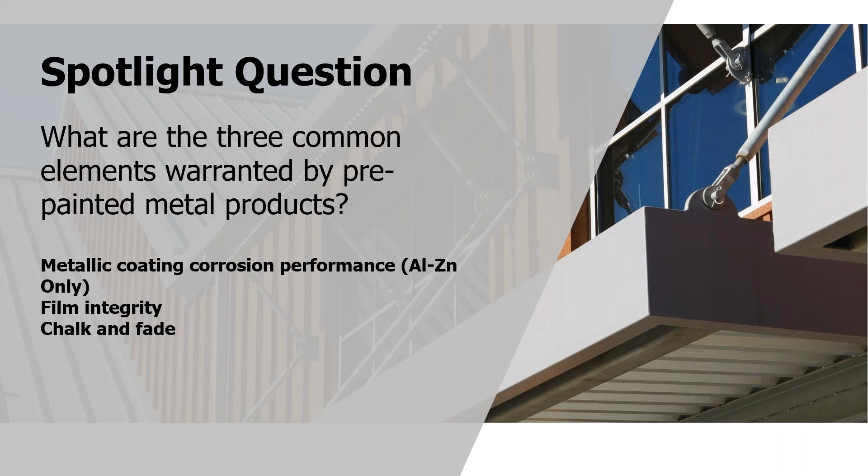Okay, very good. So now we're going to talk about the durability issues and warranty coverages for pre-painted metal. So what are the common elements warranted? It's usually the corrosion of the substrate, which would be for the Galvalume or Zincalume substrate only. No other substrate carries any kind of corrosion warranty. And then for the paint, it's going to be film integrity, chalk, and fade. We'll explain what those are here momentarily.

So the durability of this product can be anywhere from 5 years and up. Like I said, we are starting to see warranties in the 40 to 50 year range. Typically, pre-painted warranties cover excessive chalking, excessive color fade, and delamination of the top coat or primer to the substrate, which is also what we call film integrity. These failures can occur for a couple different reasons. It can be improper application of the paint by the coater, installation issues, poor paint formulation, or environmental conditions at the site. But we do see significant difference between paint system types as far as performance and warranty coverage.

This example we have here has been around in the industry a long time. This is a building in Japan that was built as an experiment in this blue color using several different types of paint. You can see there's SMPs, Kynar, polyester, and acrylic, which we didn't talk about today. Acrylics were used much more frequently 20, 30 years ago than they are now. Over just 15 years or so, you can see how significantly different the color fade has been between these systems. And like we talked about, you can see the Kynar 500 really hasn't changed at all, while the SMP and polyester have changed quite dramatically.

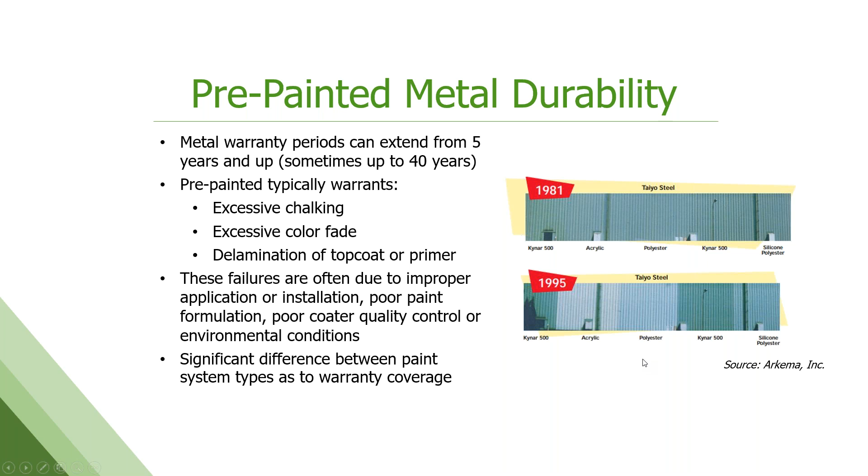So chalking is the first one, and this is probably the least understood. Chalking is exactly what it sounds like: the surface of the paint becomes white and chalky. It's a degradation of the resin system. The resin particles start to break down, and the pigments attached and embedded to those little pieces come off and lose adhesion, creating this white powder on the surface, predominantly due to UV exposure. The high-end paint systems will offer warranties of 20 years plus against chalking. There is an ASTM test for it on a scale of 0 to 10, the 10 being the best, the higher the number the better. If it's a 10, it's got no chalking. That's how the chalk scale works. This is not something we see very often anymore.

Failure due to chalking is pretty unheard of these days, and that has to do with improvements in the resin systems across all three of the main paint systems, as well as better pigment technology.

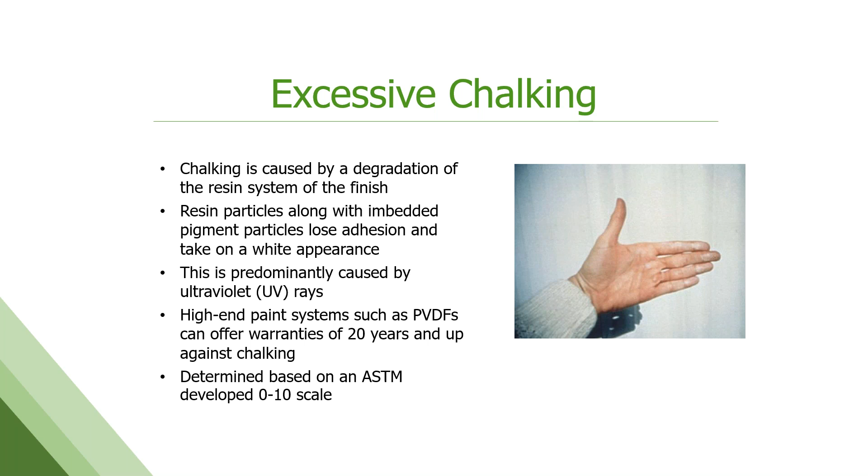Excessive color fade is a big one, right? No one wants a building that's going to fade quickly. They want it to look the same for many, many years. Fade, of course, is due to UV exposure fading the pigments. It's measured numerically by a value called delta E. We can actually go out and measure the change on these buildings from beginning to end. The human eye starts to pick up color difference at about a 0.5 to a 1 delta E unit change.

The PVDF systems warrant the smallest color change over the duration, usually 5 units or less over a 30 or 40 year period. So it's actually pretty small. I've got some examples here of blue and a red, with the top being how it started, then a 5 unit color change, and then a 7 unit color change. So while it's noticeable, it's not drastic.

What we find is more important on a building is, everyone knows that colors are going to fade over time, but if they fade evenly, most people don't object too much, because you're not going to see that there's a difference. However, the house here at the bottom is an example of mixed paint systems on this roof. You can see the lower end paint system has faded quite a bit, while the 2 panels of a different paint system have not faded at all, and it's become objectionable. We call those candy cane houses when they've mixed paint systems like that.

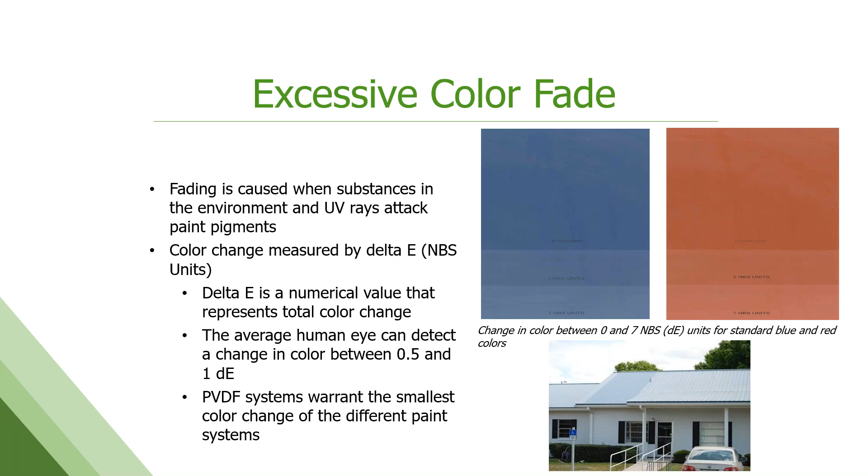Delamination is another big one, and this is probably the toughest failure we see as far as determining why, because there can be a lot of reasons for it out in the field. This is a loss of the paint film, either between the top coat and the primer, or all the way down to the substrate, and it can present in a lot of ways. It can be bubbling of the paint, peeling, chipping, cracking, complete loss of top coat. It may be small, it may be big. And the root causes are, like I said, lots.

These are the most common ones: we didn't put enough film on it during the application process, we had an incorrect pretreatment, inadequate or extended curing. So when you cure these paints, if you under-cure them, they're going to fail in the field. If you over-cure them, they're going to fail in the field. So you've got to hit the sweet spot. There's also an incompatibility between top coat and primer.

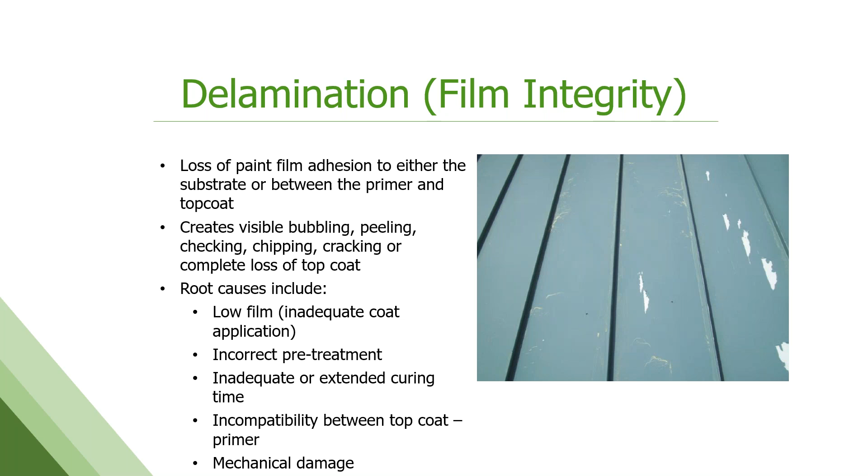And this is a big one: mechanical damage inflicted on the roofs, either during installation or sometime during their life. My favorite story on this is I had to inspect the Tahoe High School many years ago, which had paint coming off. We got up there to look at it, and the maintenance manager volunteered to us before we started the inspection that in the wintertime, the children snowboard on the roof of the high school. At which point we determined this was not a paint problem, this was due to snowboarding. Crazy stuff that happens to these buildings.

The other type of failures that we see run the gamut, and these are not typically warranted, or are actually excluded from most warranties. This includes dissimilar metals, incompatible materials, swarf and metal filings, and wet stack or corrosion issues during transport or storage before installation. And then oil canning, which is not a failure, but something that everyone needs to understand.

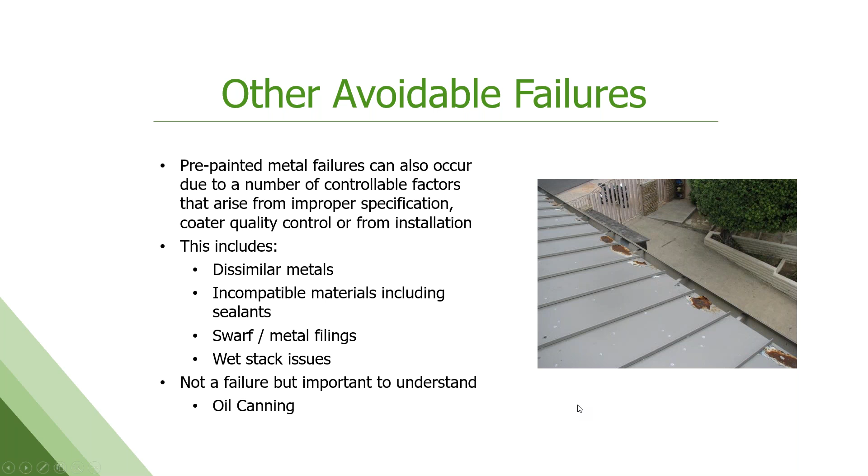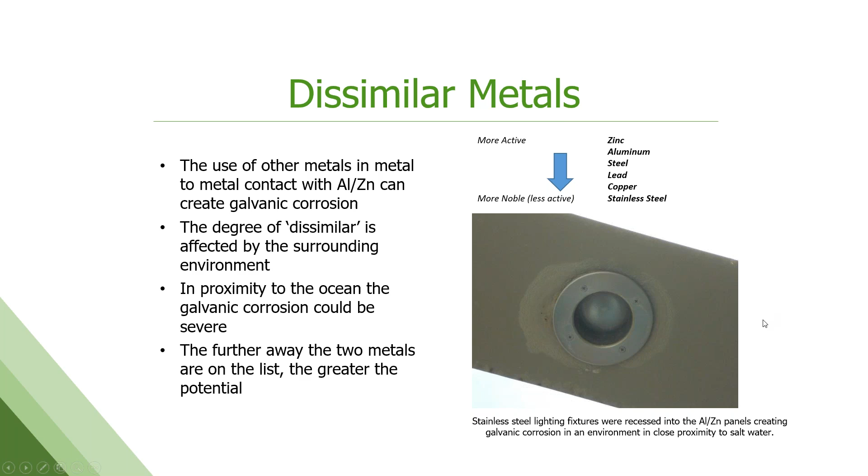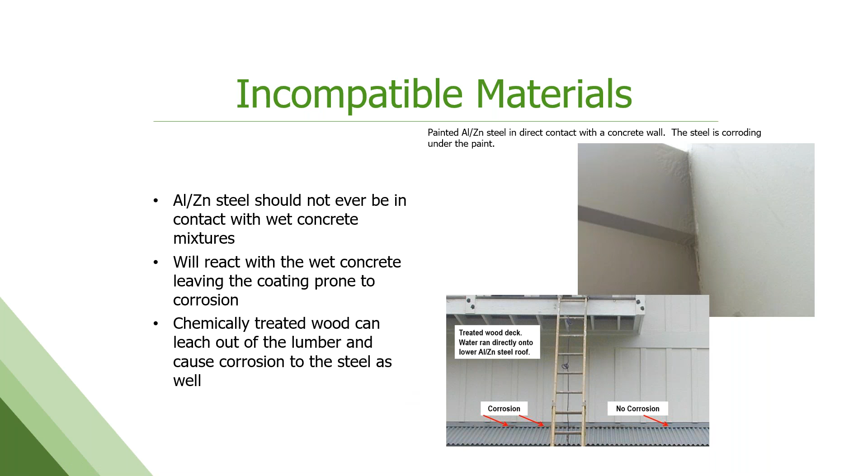Treated wood is an issue. Treated wood is usually treated with copper. Copper leaching out of that onto painted metal is a really bad combination, and that leads to premature corrosion.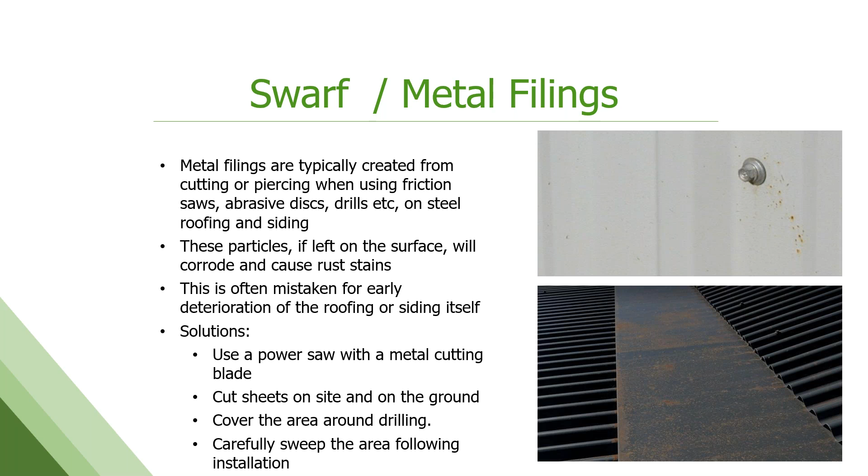Swarf and metal filings is an installation issue that we deal with on a pretty regular basis. These are little metal shavings and filings that come from drilling the fasteners in or cutting panels on site that are then not cleaned up. These little particles get on the surface and they start to rust. Most people think it's their panels rusting, but it's actually these little swarf particles that are rusting, but they leave a permanent stain on the surface that's very, very hard to get off. And often the panels have to be replaced because of that. So we have a whole technical bulletin on that about how to cut properly, how to clean up immediately after, and if you do see some of this swarf developing, what to do about it quickly.

Wet stack or storage corrosion is another issue with pre-painted metal that can be quite serious. When the panels are in bundles being transported or stored, they're very tightly packed together and there's very little air movement, but moisture can still get in between them. And when you have moisture without the presence of air, that allows that moisture to migrate to the surface through the paint and cause corrosion underneath the painted surface. And the paint starts to bubble up and you get this sort of rough blistered appearance.

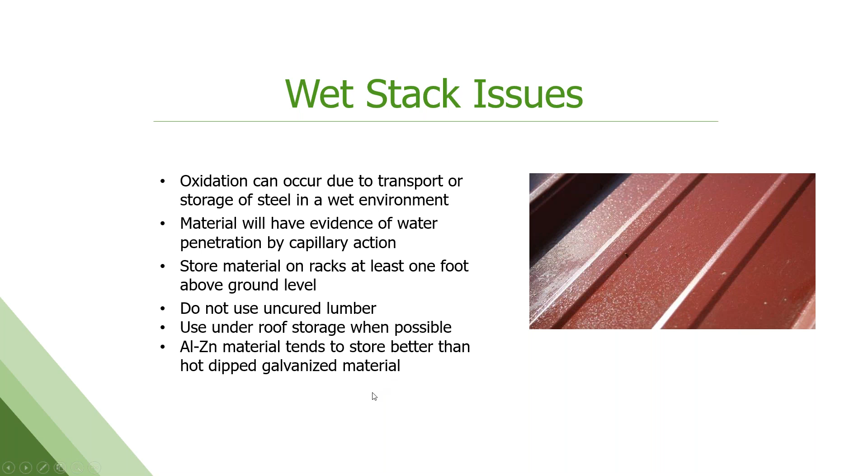So there's a lot of information out there about how to properly store it. It needs to be off the ground. It needs to be at an angle so water can run off of it. Don't use uncured lumber against it. Store it inside if possible. Zinc aluminum, galvalume does tend to hold up a little bit better in storage than galvanized on average.

Oil canning, we've probably all seen this. Oil canning is an inherent issue with light gauge steel, especially. It's not a paint issue necessarily. It's not even really a substrate issue. It's just sort of the nature of the beast. So this is buckling, or a wave pattern that happens in installed panels.

There can be a lot of causes. It can be due to stresses in the base material, improper fastener pressure, misaligned panels, thermal expansion that wasn't accounted for. But there are ways to combat it, and that is specifying tension leveled material, which is pretty standard for all coil producers. You can use stiffener beads or striations in a panel design, and that's the example on the bottom. So this is the exact same profile of panel with and without striations, and you can see the difference in the buckling. Embossed surfaces help break this phenomenon up, and lower gloss coatings - while the oil canning is still there, if it's a lower gloss finish, you don't see it as readily.

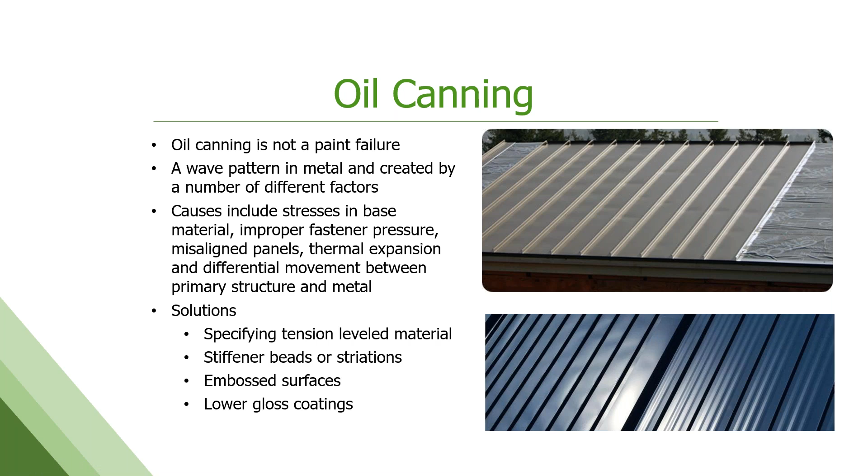So how do we avoid these failures? Well, paint specification is huge, we've talked about that. The environmental considerations are important. Use a good coil coater who knows what they're doing and is going to apply the paint correctly. Don't mix batches or types of paint systems. A reputable panel manufacturer knows how to package and handle the product prior to install. And then a good installer - good metal installers can be hard to find, and not all contractors have experience dealing with metal out in the field. And then frequent cleaning and maintenance needs to happen as well.

You don't ever not wash your car. It's the same thing with metal panels and roof - they do need to be washed down and cleaned periodically.

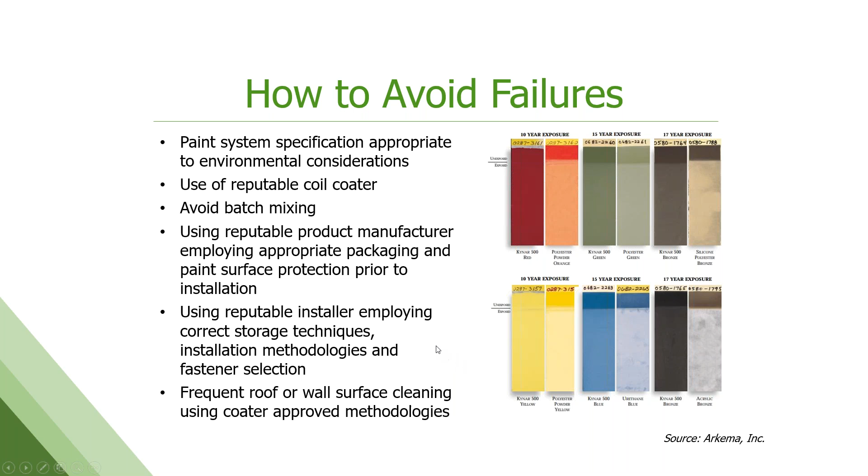And I know we're running tight on time, sorry. The last part here is warranties. You really need to understand warranties. A lot of warranties will have the headline of things like lifetime, 30 years, but you really need to read in to understand what that means and what's really being covered by the warranty. So they typically vary depending on the environment. There's some examples here - if it's industrial or marine, it's not going to be the same duration. There's going to be some special requirements around that have to be met.

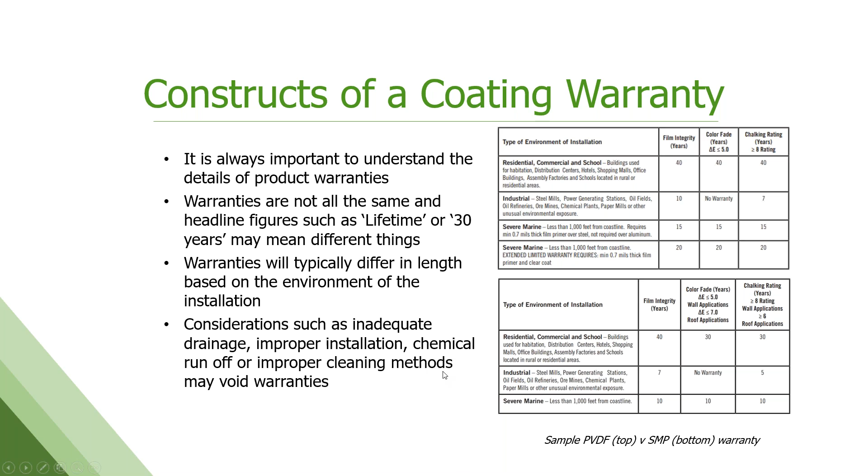There's a lot of exceptions in all of these warranties that you should read through carefully about drainage, installation, maintenance, and damage from acts of God. I'm sure you're familiar with that. If you're specifying a paint or you're not sure about a paint specification, ask for sample warranties, read through them, and discuss it. Make sure it's what you're expecting. Non-uniform changes in appearance that result from unequal exposure to light are typically not covered. Again, marine and industrial applications typically need to be pre-approved by the manufacturer to get a warranty as well.

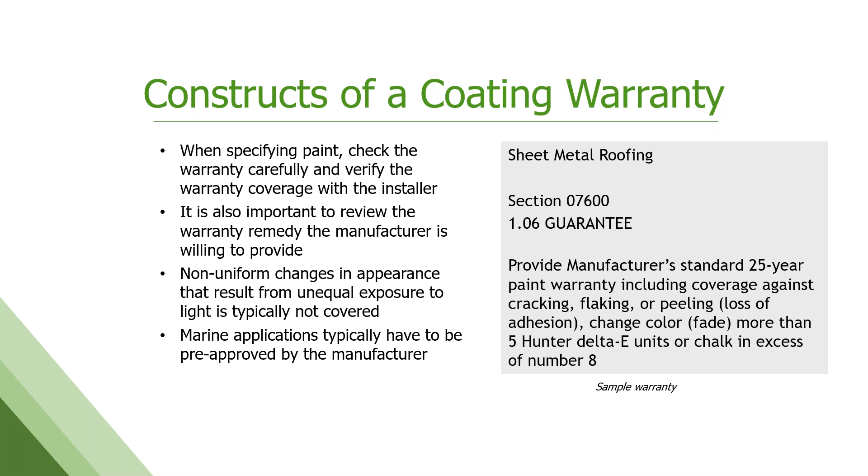So here we are at the summary. I know that was a lot and we've run a little over, so I'm not going to read this to you. I think you all know what we went through. I will point out one thing real quick, back to my car analogy. We've talked about these pre-painted metal warranties, anywhere from 20 to 50 years, on a building exposed to the elements forever, often with not a lot of maintenance. A lot of people are surprised to learn that most auto paint warranties on a nice brand new car are only 7 to 10 years.